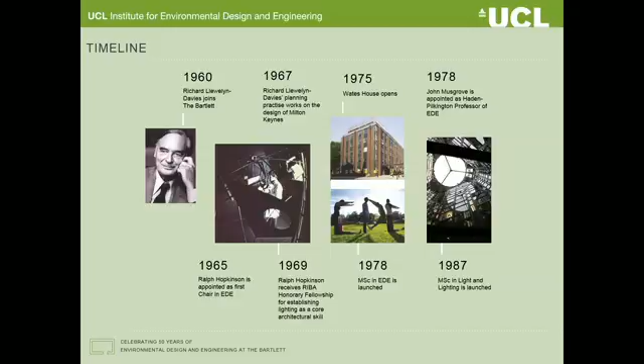The MSc in environmental design and engineering was launched in 1978, and the MSc in light and lighting in 1987. Pat O'Sullivan was appointed as the Haden-Pilkington Professor of EDE in 1989, and in 1992 the MSc in Facility and Environment Management was launched.

In 2014, we established the UCL Institute for Environmental Design and Engineering, which now sits with the other institutes that comprise the Bartlett School of Environment, Energy and Resources. We're all together in one building in Central House, just a few minutes' walk away from here.

So what do we do at IEDE? Well, we have a very clear focus on buildings and the urban environment. We have an approach based on disciplinary excellence in, for example, the areas of building physics, modelling and monitoring of building performance, issues of health, human well-being, productivity, energy use, and climate change issues relating to both mitigation and adaptation.

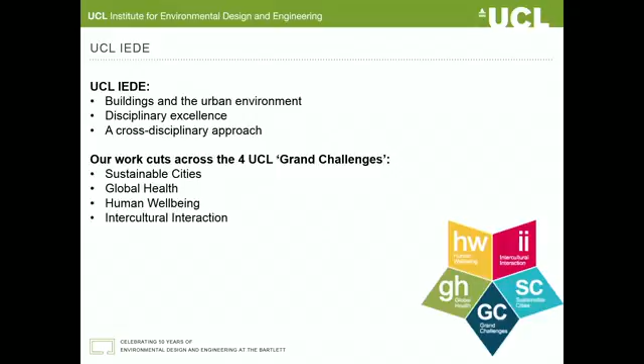We also combine this disciplinary excellence with a cross-disciplinary approach. Such cross-disciplinary interaction, bringing together varied disciplinary expertise and different theoretical perspectives, is, we think, essential. So we're pursuing a deeper understanding of the part played by choices relating to buildings and the urban environment, engaging with the major issues of our time. Our work cuts across the 4 UCL grand challenges of sustainable cities, global health, human well-being, and intercultural interaction.

In this very brief introduction, I'm going to say just a few words about our view on the total performance of buildings and how we are responding to the associated challenges. So what do we mean by the performance of buildings? Do we mean their energy performance? Well, yes, but of course we also mean a much wider performance.

For example, the adaptation of the building to climate change, the mental and emotional well-being of the occupants of the building, the physical well-being and the health of the occupants, productivity, and what about wider issues such as broader sustainability issues, housing affordability, for example, community social cohesion. Well, all of these things are important.

But how are our buildings actually performing? Even if we just take one issue, energy, for example, are buildings actually achieving their energy performance targets? We'll hear more about that as we go through the course of today. But even if they are achieving their energy targets, can they do this whilst achieving their indoor environmental quality targets at the same time? Energy demand reduction alone is worthless unless it allows buildings to be healthy, comfortable and productive places to live and work in.

So here's an example of a simple but useful, I think, performance-related question: is it possible to both reduce the energy demand of our building stocks and still achieve good indoor environmental quality? And it's this particular question that we're addressing in a new joint project with China that's just started.

This project is called the Total Performance of Low-Carbon Buildings in China and the UK, or TOP, and it's a project funded by EPSRC and the Chinese equivalent, NSFC. It's a collaboration between Tsinghua University in Beijing, China, and ourselves at University College in the UK.

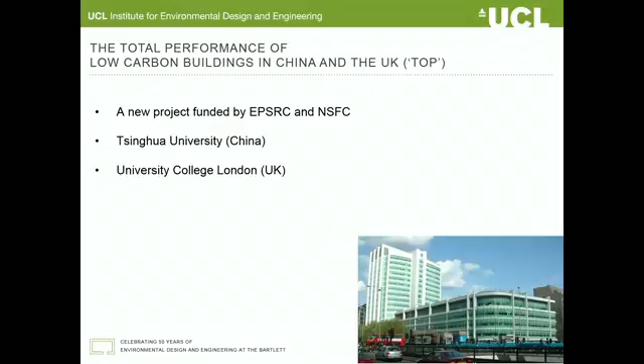We think this work is essential. For example, recent work demonstrates the potential for very significant health impacts of household energy efficiency measures due to changes in indoor environmental quality. And another recent study suggests that indoor air quality can influence office productivity by around 10%, hugely important given that staff costs typically account for up to 90% of business operating costs.

So a substantial part of that work in that project will deploy building physics approaches of monitoring and modelling of a range of low energy buildings in both the UK and China, in order to move towards a robust process for the real-time identification of building underperformance.

But we also have a major part of the project devoted to systems thinking. Well, what is this? Why are we doing this? What does it actually mean? I'd like to look very briefly at what made us think this is such an important component of this project by considering an example of some relevant work at IEDE, the HEW project.

So the Housing, Energy and Wellbeing project - the context for this work is the required stock transformation in the housing stock that needs to take place to meet these very challenging carbon emission reduction targets. As around a quarter of UK energy is consumed in dwellings, it's an important target for such carbon emission reductions.

Given that a very high percentage of these buildings are likely to still be standing in the 2050s, it puts a great emphasis on retrofitting, low energy retrofits. You may have seen this rather startling figure before: the implication is that one home needs to be fully retrofitted every minute.

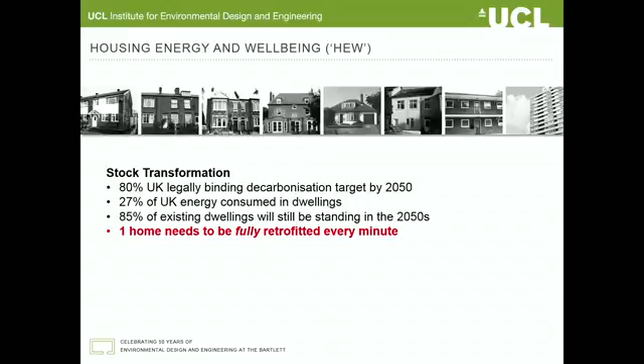But in attempting to undertake this radical transformation of millions of dwellings, we must pay attention to the possible unintended consequences of doing so. As part of our EPSRC-funded platform grant, another project, this work was undertaken and uncovered over 100 relevant unintended consequences of policies to improve the energy efficiency of the UK housing stock. So it became clear that we needed a more formalised approach to this complex problem.

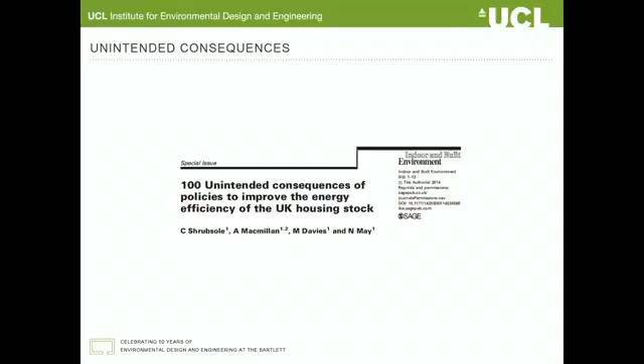Such complex systems have emergent properties - behaviour that you couldn't predict from knowledge of the individual components of the system. Only when they come together to form the system do they have these unexpected emergent properties. So we turn to the field of systems thinking and system dynamics, the principles of which have been around for some time and have been applied to other sectors and problems, but we believe there's an important opportunity here for built environment performance.

So how should we proceed? In the HEW project, we used participatory system dynamics modelling in conjunction with a large team of stakeholders, we're very grateful to them, to develop a qualitative causal theory linking housing, energy and well-being. My colleague in this initial part of the work, Alex Macmillan, interviewed these stakeholders and asked them simply about what they understood to be the links between housing, energy and well-being.

Each interview resulted in a cognitive map, and we were then able to assemble a combined map that wasn't in any one single person's head, and new connections thus emerged. We then held workshops to further develop those maps. Putting the interviews together, we came up with what represented our current combined in-practice understanding of the system.

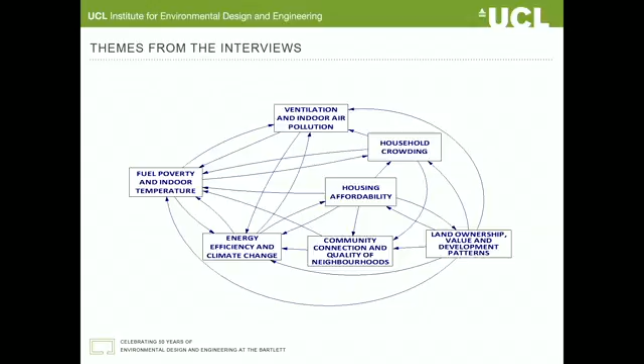But let's look at the example we undertook for the Green Deal. I think we've shown that some useful simulation can be done in simply trying to understand, for example, just the likely success of the primary objective.

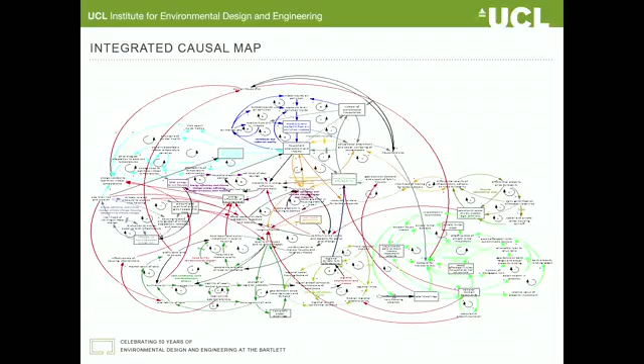I think it would be true to say that the take-up figures of the Green Deal were disappointing. I'm sure you're aware that the Green Deal was the government's flagship energy retrofit initiative, and it didn't quite work out as planned. So why was there such a poor take-up?

So we had a look at that using these causal maps and quantitative modelling that we undertook here. This rather simple graph here is showing the desired number of Green Deal interventions in green, and this is several millions. Unfortunately, the blue line represents the actual number of implementations, a much smaller number, running along the bottom here. So something didn't quite work out as planned.

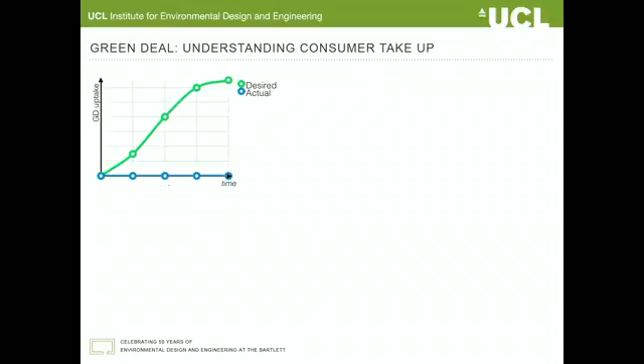Well, why might it be? Well, the Green Deal was really predicated on a very rational financial decision-making process in households. So Nici Zimmermann from IEDE built a quantitative system dynamics model using aspects of the causal maps to test that assumption.

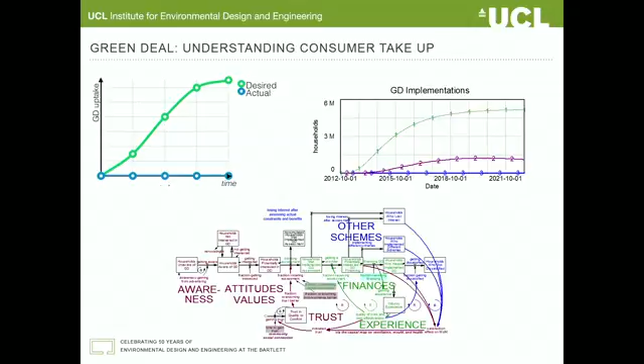Of course, such a model can never be perfect, and I'm certainly not presenting it as a perfect model. I'm showing it here simply to demonstrate that by incorporating wider aspects from the wider system, it may be possible to construct useful models of such policies which are better placed to understand reality. And this type of work with Nici and a growing team is continuing here at IEDE.

So in conclusion, just this initial part, there are two major related bodies of work that I believe are required to address the total performance gap: research to support the development of relevant building assessment methods, technologies and tools, but also vitally, research to support the development of relevant policy and regulations in order to effectively implement such tools.

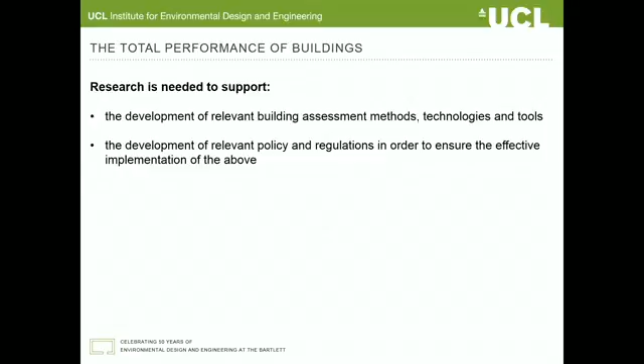So that's exactly what we're doing in the new TOP project with China, in the particular area of energy and indoor environmental quality. However, we're also doing more. For example, continuing on the theme of a cross-disciplinary and systems-based approach, IEDE has taken the lead in setting up the new UK Centre for Moisture in Buildings.

And we plan to formally launch the centre in mid-2016. Neil May, who many of you know I think, has been leading on this, and as well as establishing a core team of centre partners, we've established a great advisory group. We had a very positive meeting of that a couple of weeks ago.

So the core partners are IEDE, UCL CEGE - that's Civil, Environmental and Geomatic Engineering - the London School of Hygiene and Tropical Medicine, the Building Research Establishment, and Heriot-Watt University.

So moisture in buildings is another example of a very complex system. And we have, I suppose, the very ambitious or impossible aim of moving towards the development of a moisture-safe built environment in the UK, but in doing so, hoping to substantially improve the way moisture risk is understood and managed in the UK. So we hope to do this via the establishment of this independent centre with national and international expertise linking research, government, finance, industry and building owners and occupiers.

Why do we think it's so important now? Well, moisture-related risks appear to be increasing, but there's huge uncertainty about the causes and effects. There are increasing concerns at all levels due to effects of flooding, retrofit and new build. And we believe that research in this area needs to catch up from years of inattention.

Other examples of IEDE initiatives relate to our belief that the integration of research and education is essential. Hence, to complement our existing master's programs, we're developing other courses, and the two that we'll start first are one master's course and one undergraduate course.

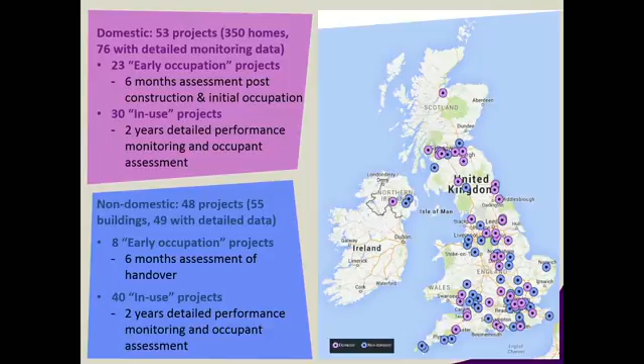Very even spread across the country through population centres.

The project would not have succeeded if it wasn't for the dedicated team of evaluators. We've got some evaluators here, by the way. Put your hands up if you've got any evaluators. I'm looking at one, Carl Richard, thank you. There's one. So really fantastic group of people. The evaluators essentially project managed and stewarded so many of these programs through across that 5-year period. And there were some really difficult challenges with some of these projects. Some of the things that were found, some of the expertise that was needed to make these things happen, they are so dedicated. You put them in a room together and you can just see the ideas spinning off. It's absolutely fantastic. A really great group, and they've helped contribute to the success of the program.

So what did we gain? What did we measure? If you're interested in domestic data, there is a huge amount of data stored in the EMBED platform. There is a whole dedicated project page set up on the KTN website. We have CarbonBuzz, which has stored all the non-domestic data, the BUS methodology from Arup, and CIBSE TM22. We actually contributed to part of the updating of that standard as well. Plus, we also have a huge amount of data, and that looks a little bit like that.

So that's some of it. It's about 33,000 files, 27 gigabytes. It looks like that if you look at it in Explorer. So every single one of those is a folder full of project data, and every single one of those folders is 7 or 8 sub-levels deep. This turned into a big data challenge, and this was something that we weren't expecting.

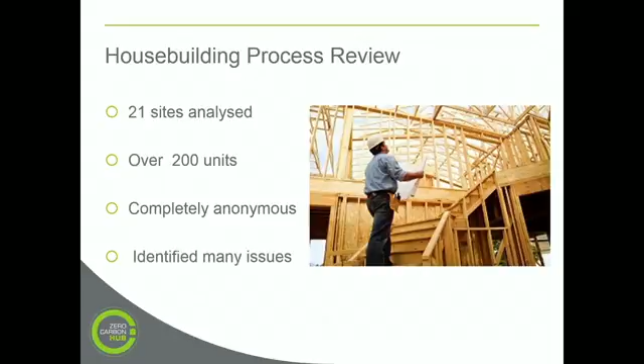And we identified one heck of a lot of issues, and I'll take you through some of those. We actually put a document out, available in the foyer later, called the truth behind those myths. All those people came up with all the problems, and then we started to identify what really were problems and what we weren't really sure were problems.

We came up with a simple 2x2: how much evidence do we have against the impact on the performance gap? That was interesting, because one of my favorites was when you work on a building site and see the drawing identifying a particular material, then you go into the building being built and see a completely different material.

There are also issues with specifications for taping. Does anyone actually know how to specify a particular tape? You go to the manufacturer, he tells you what to use, you write it down and put it on the drawing. Then the contractor goes to the pound shop or 99p shop and buys the same-looking duct tape used everywhere else, and it looks exactly the same as the specified tape on the drawing. But one lasts about 5 minutes, the other lasts about 50 years. So we do have a real problem trying to identify products.

One of my keen ones was, when you go on a building site, can you identify easily what was the design intent? Most of the time you can't. I'll give you one example.

I built a block of flats 11 stories high. We had dense blocks for the party walls and lightweight blocks for the external walls. When it rained, they all looked the same colour. So when the forklift went to get the blocks from the compound, after it had been raining, he delivered them to the bricklayers, and we built this block. It wasn't until the building dried out that we realised we had the lightweight blocks on the party walls and the heavyweight blocks on the external walls - but you couldn't tell when you were building it. So it's those sort of things we tried to find evidence for against the impact on the performance gap.

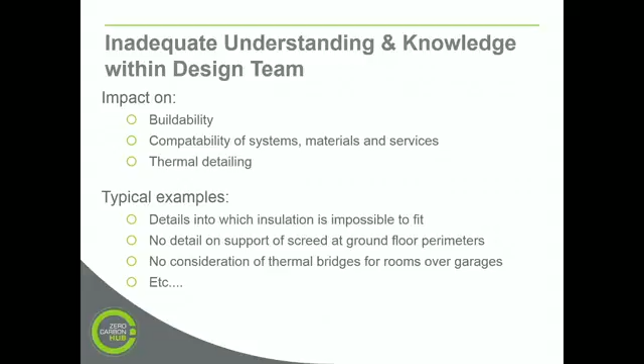I'll take you through some examples where insulation's impossible to fit, and various others. I'll give you this one, because it's the one that interests me probably the most, having been on the practical side of delivering buildings for many years.

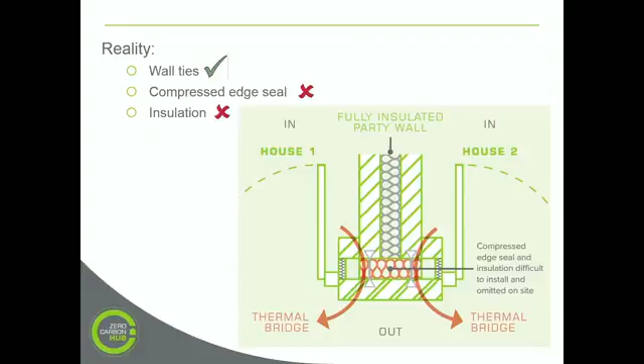The team were on site looking at this particular pier between two doors, and it was clear the insulation was just missing. The bricklayer came over and said, you're wondering where the insulation is, aren't you? The inspection team said, yeah, where is it? Why haven't you put it in? He said, well, you have a choice — you either have wall ties or you have insulation, which do you want? I made a decision to put in the wall ties to keep it structurally sound, but I can't get the insulation in as well. That was the sort of practical example we came across so many times during the inspections.

What about the issue of those SAP assessors' competency? Well, we found there were problems with the accuracy of the inputs. People weren't following the conventions, they weren't validating the assumptions, and they certainly weren't producing anything remotely like an as-built SAP. When we do U-value calculations, do we even understand what a U-value is?

I don't think many of our profession actually understand some of this stuff. When we see a typical example like this, where we have a design for roof insulation half a metre thick, with a particularly low pitch, by the time you get to the perimeter of a detached building, the insulation is diminished dramatically. At the perimeter of the ceiling to the wall, we often get mold growth, this sort of black line — that's because it's a cold spot. We're getting a cold bridge, and we need to understand this stuff much more.

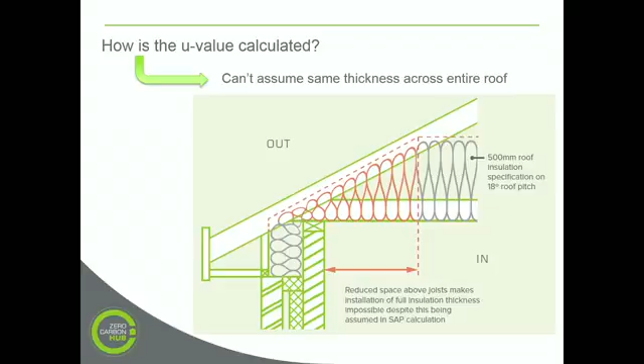But we don't — we just apply the same basic criteria. Twenty-five quid for my SAP assessment, it's all going to be 500 thick right across the whole area, and that's what I'm going to put in.

What about the lack of team energy, performance and related knowledge and skills, and or care? A BRE report some years ago said the reason we don't get it right on site is people don't care. I won't swear today, but I was going to come up with a very strong adjective to describe what I think about that, because actually people do care. I honestly believe they do, but there's a lack of proper training of the workforce, resulting in significant construction faults, unplanned design solutions, and wrong system commissioning. That was from Dr. Brooks, as part of the Innovate UK performance gap work.

An absolute classic statement: lack of proper training for the workforce. When you're a bricklayer at the age of 16, you do your apprenticeship — you never go back and get retrained, never, for the whole of your career. You just get trained once, and that's it. So you never get updated with new information. When we started to talk to the guys on site about why it was wrong, they said, oh, we didn't know that, we'll change it then, we'll do it right next time. It didn't take long to start to improve the performance of the individuals concerned.

What we did find, though — one of the most fascinating things for me — was that we never found one window in the right place. At all 21 sites, all 200 units visited, there wasn't one window in the right place. Now, that has got to be a world record, surely.

That's serious, because it creates this massive design fault and a massive performance gap. When I raised this with a top 3 house builder and said your windows are all in the wrong place, he went back to the manufacturer, and they changed it by putting an extra stop on the former. They changed the design, and overnight they all go in the right place. It didn't take long to fix. It's just that people weren't aware it was wrong.

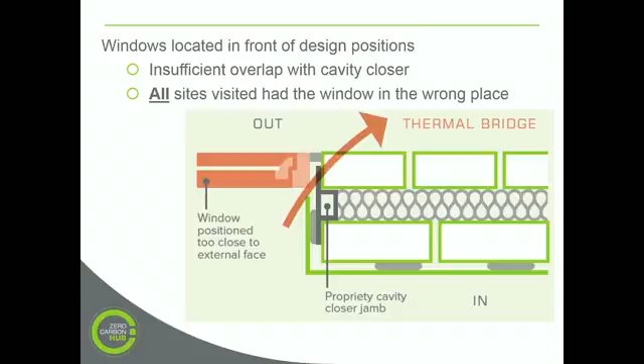What about my favorite one, about the pound shop and the sticky tape? Well, product substitution is rampant on most building sites, mostly for cost-driven reasons. But the most striking observation about the application of materials and components was the number of occasions on which materials intended for one location were found in another, which goes back to the building I built, which unfortunately had blocks all over in the wrong places.

Construction detail scheme - we definitely need to get better at construction detailing, and we need to gather more evidence. But we didn't actually leave it there.

We had a very good minister at the time, Don Foster, who we worked closely with, and we also dealt with a guy called Stephen Williams on this. We said to him, what are you going to do, government? Back to my mammoth at the beginning - what are you going to do to sort this problem out? I said, you've got to give a signal, a clear direction that we must address the problem. I just wish we'd had the Volkswagen issue then, because it would have made a bit more of an impact.

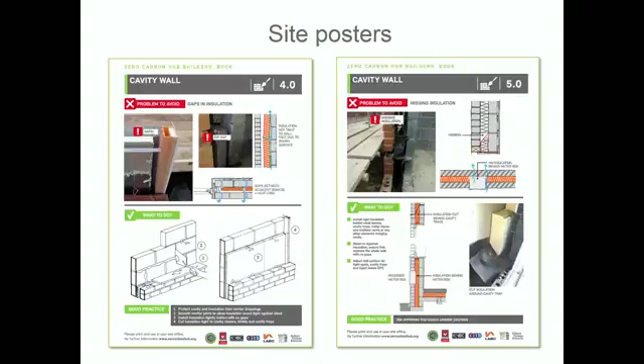They're just clear, simple, basic, but they provide people with information. It's one of a series. You may also see today - I think this is the day we're actually launching it, I should mention that - thermal bridging. Anyone any good at thermal bridging? Anyone understand it?

Well, if you do understand it, please tell us, because no one else does, and we've had a real good go at trying to understand it ourselves and put it into a document you can read. So in your pack, you should have this. Tell us what you think of it, and if it needs to be revised or improved, we'll be glad to hear your feedback.

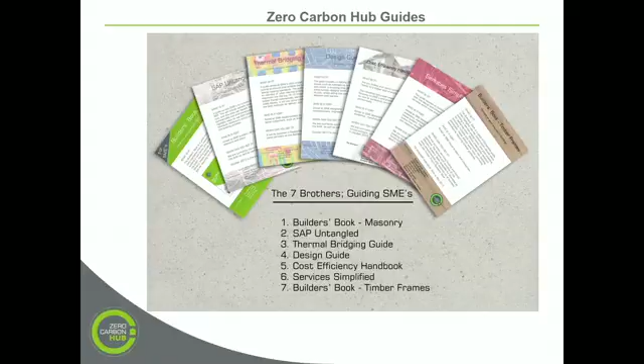Just one or two slides on the future to finish off, on the performance gap. What about overheating? Do we understand it? Government's beginning to panic, and has given us two commissions this last few months on overheating. I know many of you are involved in that subject, but there's a performance gap. If we're designing buildings today to last 100 years and they're not ready for the future, then we have a problem. Please get involved with our overheating work. It's really, really important. I am beginning to see government getting very twitchy about this.

We've got the Environmental Agency, Public Health England, which also covers Wales, by the way, but they don't get mentioned. I live in Wales, so I've got a slight bias. I'm really interested in overheating.

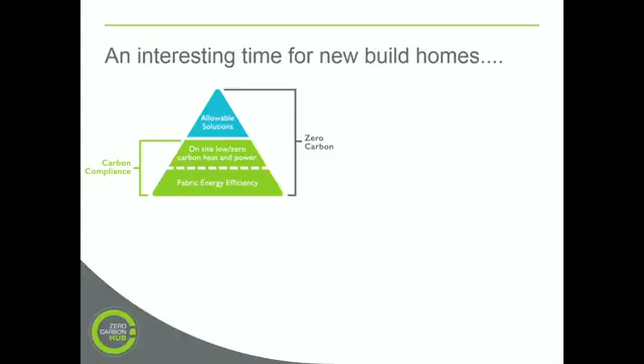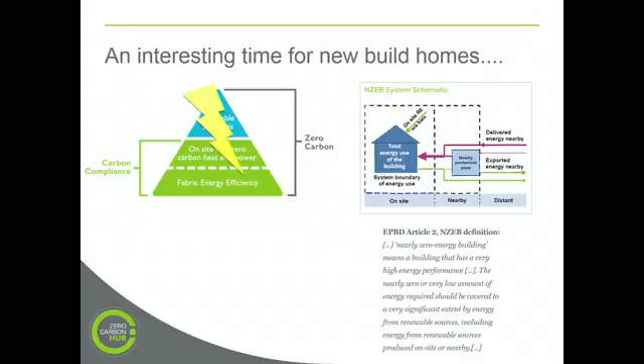Last slide, interesting time for new build. We've seen the lightning strike on the zero carbon policy. We've obviously seen the horizon, which says we have a nearly zero energy building coming up, and that's the definition. So from 2021, January the 1st, all our buildings will be working to the new European definition, if we're still in Europe.

That's all from me. Hope you found that interesting. I think we're going to have a question and answer session now. Thank you very much.